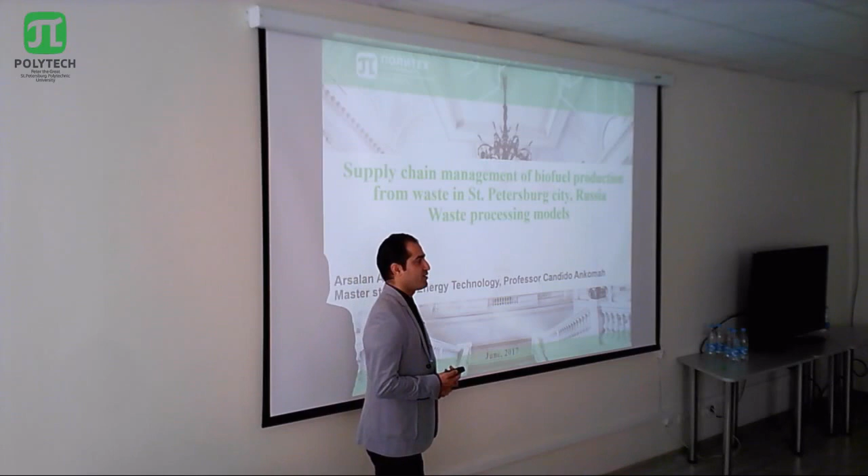Waste generation is an undeniable fact of human's life and used to be considered as a useless material until humankind started facing a shortage of energy sources, high demand of energy, and the utmost importance of global warming. Then they started investigating waste in urban areas, and they found it as a sustained source of energy. Dear professors, ladies and gentlemen,

for St. Petersburg, during the next slides, there will be two models. First of all, some of the problems and challenges of the current waste management in St. Petersburg will be extracted and discussed, and even compared with two neighboring countries, and then two models in general form of chain management will be introduced, and then two of the common treatment technologies will be evaluated financially and technically, and the potential, feasibility, and applicability of those treatment technologies will be approved here.

First of all, St. Petersburg City is located in a very critical location. Why? Because it has access to the Gulf of Finland, and it can easily spread the pollution to the sea, to the neighboring countries, Finland and Estonia. That's why it is very important to manage the waste and stop leaking to the sea.

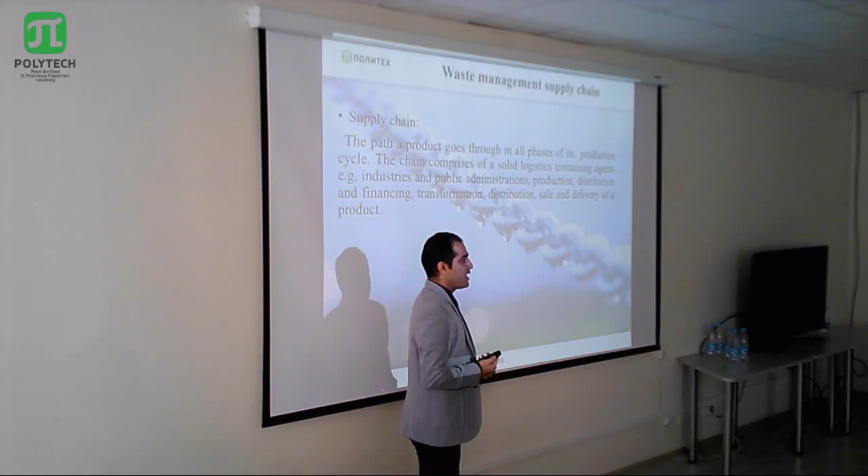Here, a supply chain is proposed to start using waste in a sustained way. Generally, supply chain starts from producers to the consumers. But here, the model is proposed to consider people as the suppliers of the chain. It means that they produce waste, the waste is transported to the facilities, and then the desired products will be generated in those facilities and vended in the market. And again, the citizens will use such products.

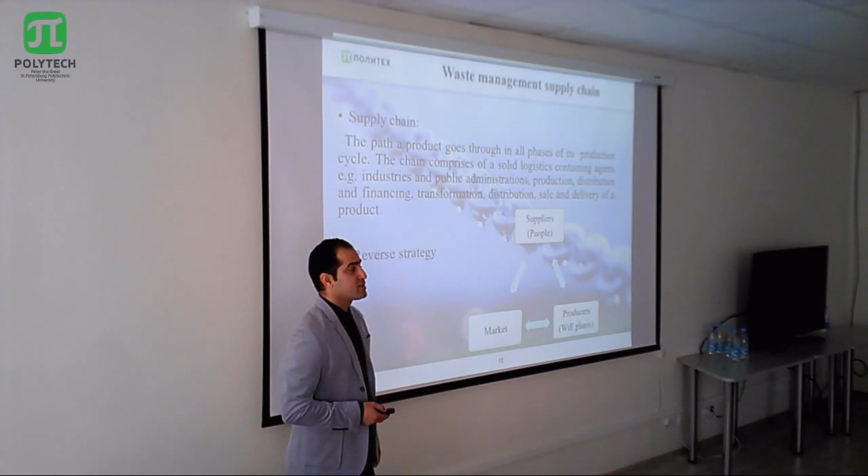So that's why such strategy is called reverse strategy. It starts from people by producing waste and utilizing it in those facilities. And here it is a comprehensive chain to make the process sustained. And as I already explained, here we invest our time, money and energy on raising the public awareness.

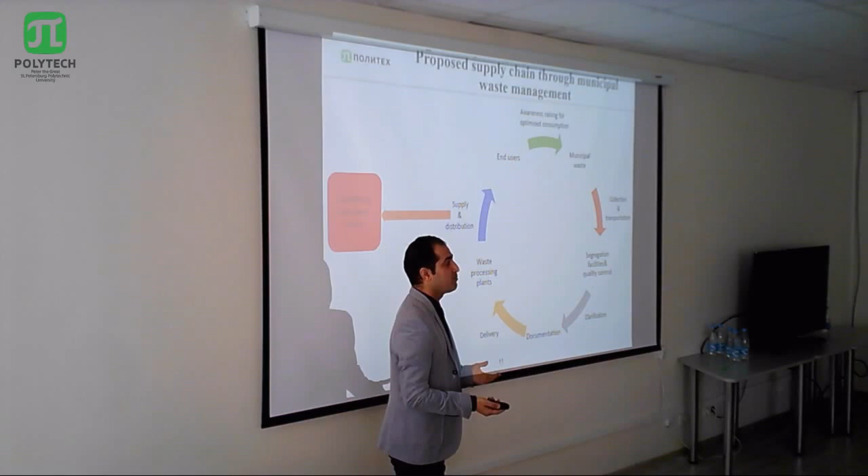And then the waste will be collected, transported, and segregated in some separation facilities. And the statistics about the waste will be classified and shared publicly for scholars, researchers, and university students for further processing, further evaluation. And then the waste, after being segregated, will be sent to the waste processing facilities, and the valueless materials will be disposed to landfills.

Therefore, the general framework of the models will be based on such supply chain management, and the models will be based on household separation as the first scenario, and the second one will be centralized separation. For the first scenario, the waste separation will be performed at houses. It means that there will be 4 different bins for paper, plastic, glass, and food leftovers.

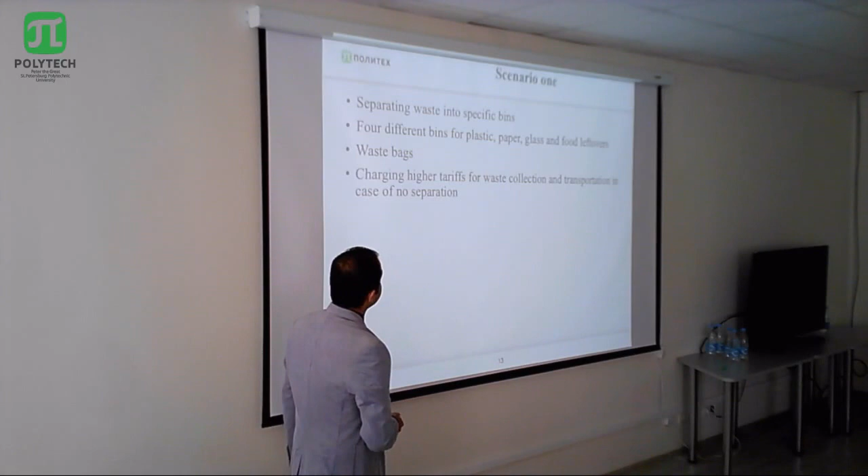And it is even considered to utilize waste bags made up of paper in order to avoid using non-recyclable materials. Householders who do not perform home separation will be charged extra tariffs for waste collection and transportation. And we see the scheme of the first scenario as house separation, then collecting and transporting to the facilities, and then it will be treated or disposed to landfills.

For the features of the first scenario, we can say less amount of waste sent to landfills, reduction in green raw material consumption, useful products such as fertilizers and biofuels, thermally valuable fuels, and the share of biofuel in heat and electricity generation will increase. And due to proposing a near location of waste treatment facilities to the center, there will be less cost of transportation, less distance, and less pollution leakage during transporting to landfills.

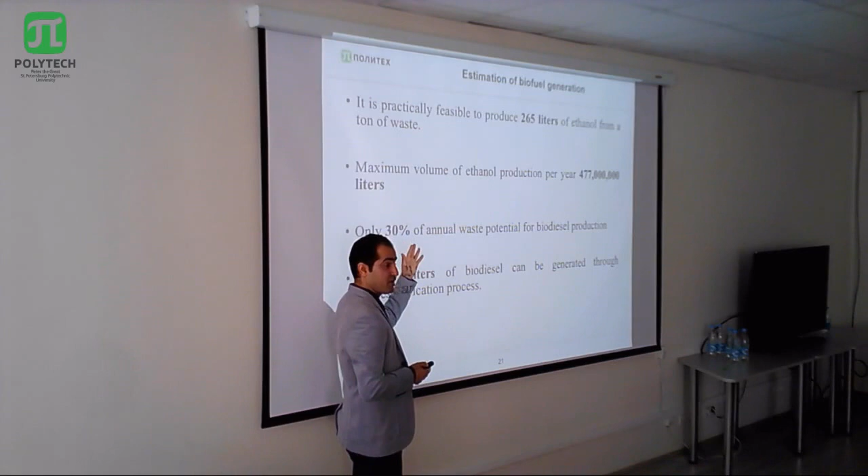Estimation: just using 30% of the waste in the city, we can produce 477 million liters of ethanol. And for 100%, or for 30% of the annual waste, we can produce biodiesel production of 523,000 liters, which is very significant.

For incineration technology, using 70% of the waste in the city, we can have almost 3,500 tons per day to produce 2,700 megawatt electricity per day and well above 5,000 megawatt thermal energy per day. By such amount of energy generated during one year, we can supply 158,000 houses with heat and 3,300,000 houses with electricity.

For the economic aspect, we have different costs including investment costs, operational, and net cost, which will be over almost 12 million, and the payback time will be almost 10.7 years. There will be further work on economic analysis and locating the best position of treatment facilities through algorithms like genetic algorithm.

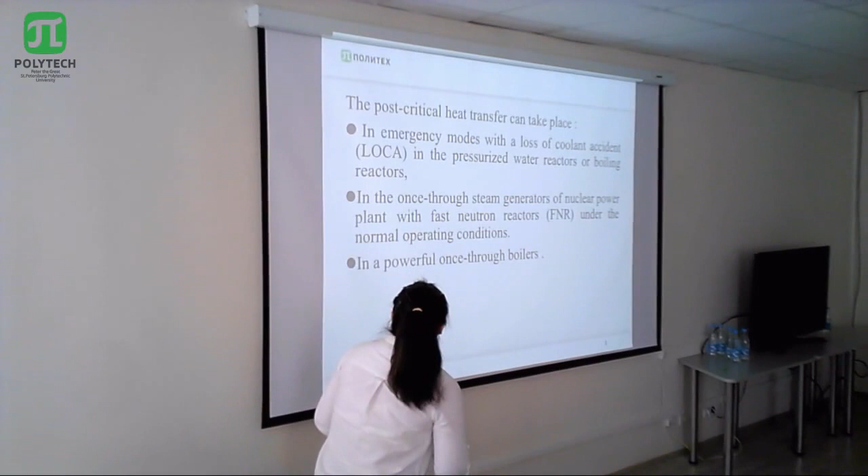Post-critical heat transfer can take place in emergency modes with loss of coolant in pressurized water reactors or boiling reactors, in once-through steam generators of nuclear power plants with fast neutron reactors under normal operating conditions, and in once-through boilers.

There are two kinds of crises in flow boiling. The first is the point of departure from nucleate boiling, which takes place at high heat flux and low void fraction, and there is the point of dry out. After dry out is the dispersed flow film boiling, and dry out takes place at high heat flux, but lower than the point of departure from nucleate boiling, and at higher void fractions.

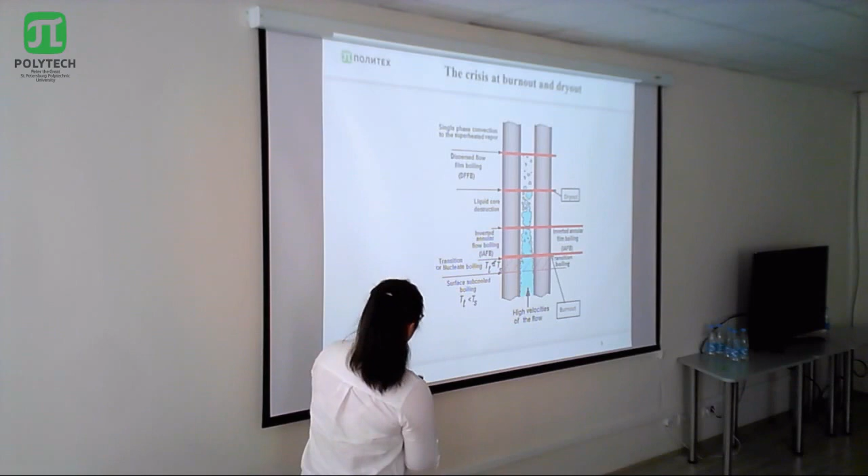The aim of my work is to compare two rather simple engineering techniques for calculation of the heat transfer coefficient in dispersed flow. I chose simple and technical models: one is the equilibrium method by Miropolsky, and the other is a non-equilibrium technique based on the Hein-Köhler model. I also used a code for best estimation of thermal hydraulics of circuits of nuclear equipment, and experimental data as basic data to compare the calculations with the two methods.

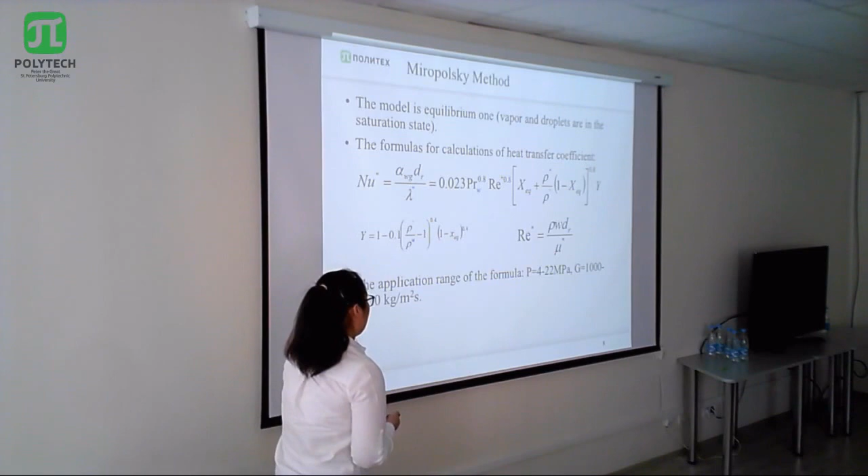Now I will explain the process of the Miropolsky method. You can see in this formula here the number of plots that need to be calculated and the wall temperature. But at first we don't know the wall temperature, so we just assume it, only from 1 to 3 Kelvins higher than the saturation temperature.

We need to calculate the physical properties at the given wall temperature, and step by step receive the calculated wall temperature. Then we need to compare the given wall temperature and the calculated wall temperature. If the difference between them is very small and the values are close, we can obtain the wall temperature. If not, we need to do the cycle again.

Another is the non-equilibrium model. Here is the original Hein-Köhler model. This is the formula used to calculate the non-equilibrium coefficients. This is for the original one, but in my work I changed the formulas to calculate the parameters. You can see these values are averaged in the coefficients, depending on the heat flux, the flow rate, and the number of droplets in the flow.

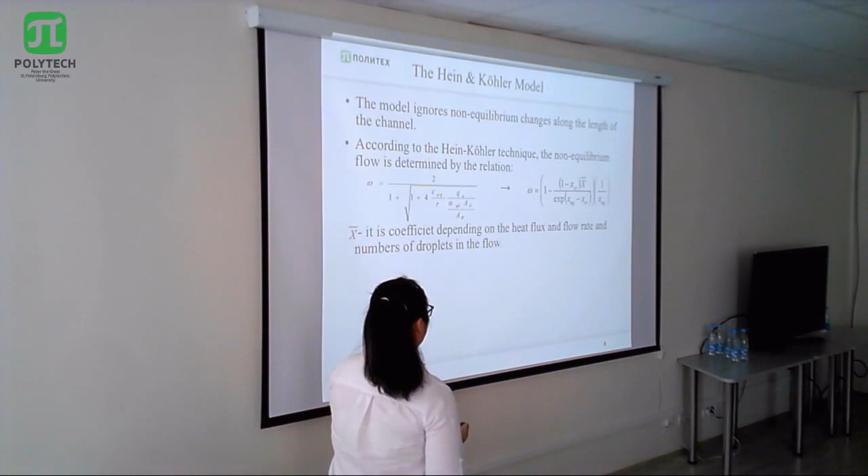This is all from the original, and in my work I will use these formulas to calculate the actual vapor content and the vapor temperature. This is used to calculate the wall temperature.

Here is the process of calculation by the modified Hein-Köhler model. In this model we need two cycles: one to calculate the vapor temperature, and another to calculate the wall temperature. You can see here the physical properties use the average temperature between the vapor and saturation temperatures.

But we need to calculate the vapor temperature. So we also need to give a vapor temperature to start, calculate the non-equilibrium coefficient, then calculate the vapor temperature and compare it, to obtain the vapor temperature from the given temperature. They have a similar principle.

So once we receive the vapor temperature, we calculate the actual quantities and use these steps to calculate the wall temperature. We also need to compare the given and obtained wall temperature. If the values differ by less than 1 Kelvin, we can get the obtained wall temperature as the final temperature. So that is the process.

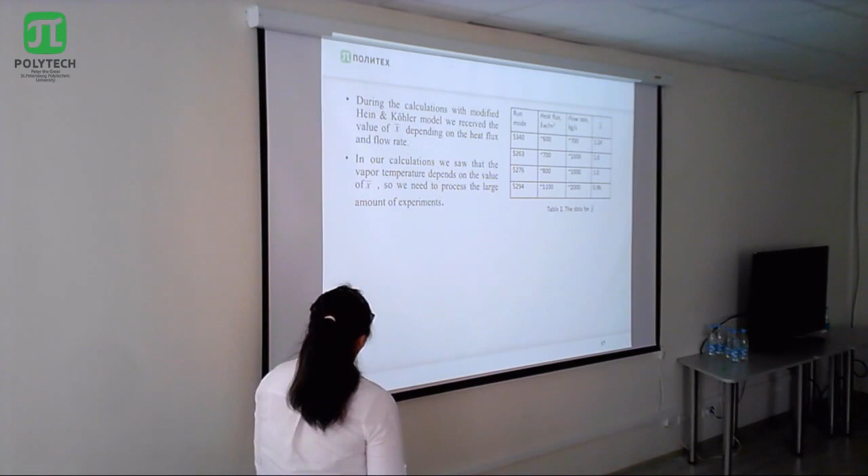In conclusion, the review of the literature on the two-phase flow heat transfer is done. There are two engineering models which were chosen for comparison: the Miropolsky method and the modified Hein-Köhler model. The Bennett experiments were used for comparison of these models, as basic data.

The results of wall temperature calculation based on the Hein-Köhler model show that obtained values differ from the experimental data by no more than 70 kelvins. For the Miropolsky method it is no more than 80 kelvins.

The KORSAR program can be consistent with the experimental data, so the KORSAR program also will be improved in the future, and it may be done using the modified model. Thank you.

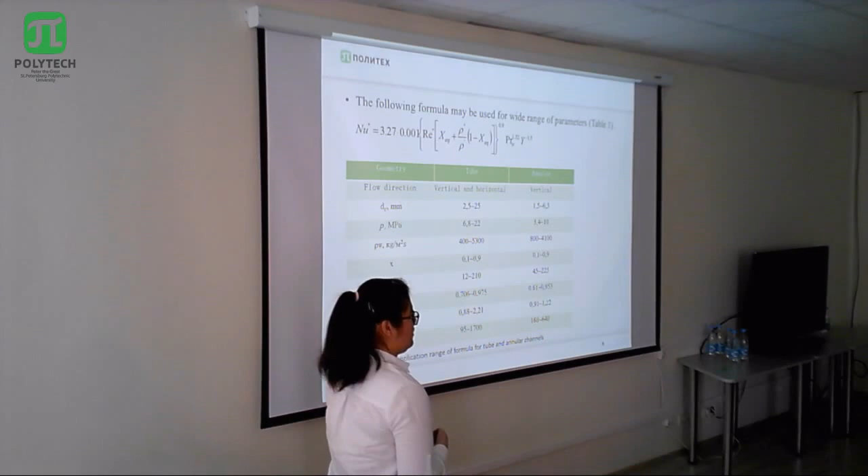Oh, okay, very nice. And also, in the introduction, I had one remark for you not to use your fingers while you present something, but then you began to use the laser, and it was very nice. That's okay. Thank you. Any other questions? Thank you very much.

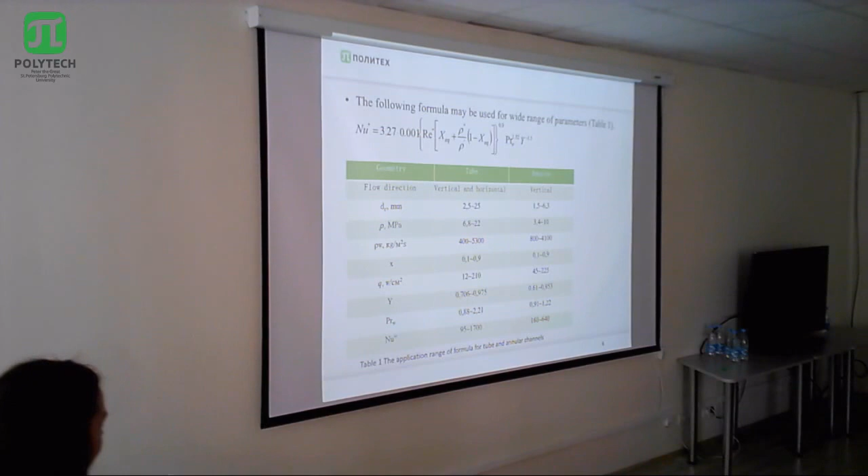The next speaker is Sultan Mahmoud. His master's thesis is Novokuznetsk City Heat Supply Systems Concept Development. Supervisor, Assistant Professor, Mr. Gimai.

Sultan. Yeah? Yeah. Yeah? I hope so. Yeah, previous, this first one. Yeah. Yeah, go ahead.

Dear committee, I am going to present my master's thesis, which is the role of the heat supply system in the city. First of all, I want to mention why I chose this project: because this project is currently developing in our university at the Department of Power Engineering, and partly I've been involved in this project.

So the content of my master thesis is as follows. We will go through introduction, general information about the city, current situation in the sector, design of mathematical model in the software, proposal for improving energy system, results and conclusion.

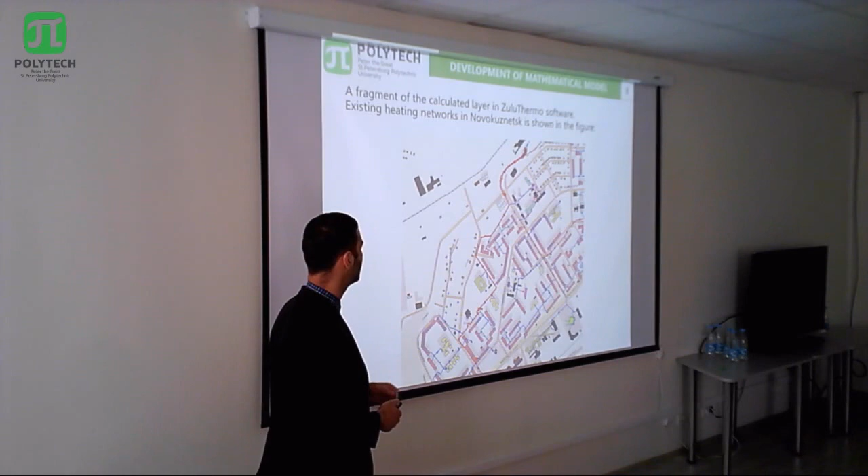So these are the proposals for improving the energy system. You can see that for each supplier there are different operations which should be done by the year 2032. On the West Siberian Thermal Power Plant there is an organization of technological communication on the steam between first and second stages, dismantling of turbine units on the central thermal power plant and commissioning of the hot water boiler.

For the initial boiler houses, we are going to close them and transfer the heat load to Kuznetskaya thermal power plant and to the central thermal power plant. These operations will help us to increase economical efficiency and to save fuel.

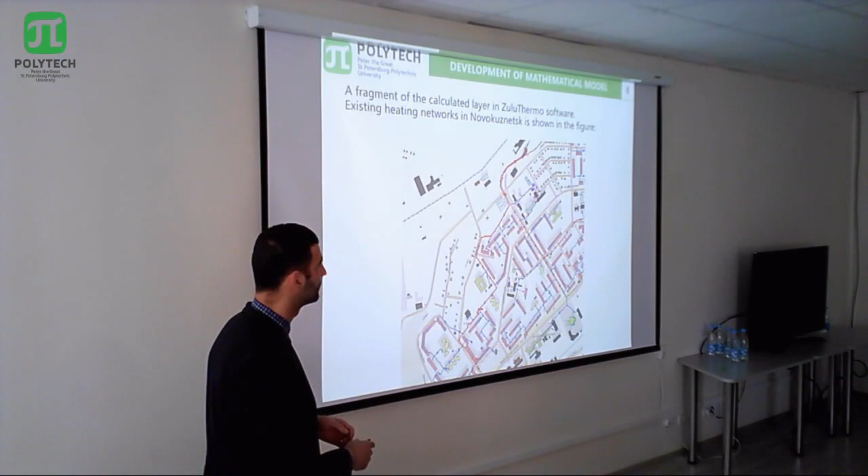So, let me ask a short question. So first of all, thank you for your presentation. It's very interesting. Could you go back to slide number 6? There were some percentages, and it was higher than 100. So just this comment, maybe I haven't heard the right information. Number 6. I'm trying. Okay. Sorry, it's not. Yes. Number 6, yes.

So here, for example, the first 2 bars, they have 100-something percentages. Could you give some short comments? So that means a bit more than 100. Because it's the total amount, can you explain?

Because yeah, this is this boiler house. This is proposed. So it's slightly remote right now. So they have, let's say, more consumers for now, but after improvement of the energy system, we can get this amount of energy supply. Any other questions? Thank you very much.

Next is research of application of heat pump system in conjunction with boiler for individual consumption. Supervisor, Associate Professor Bogan Karamonova, advisor, Ekaterina Demushkova.

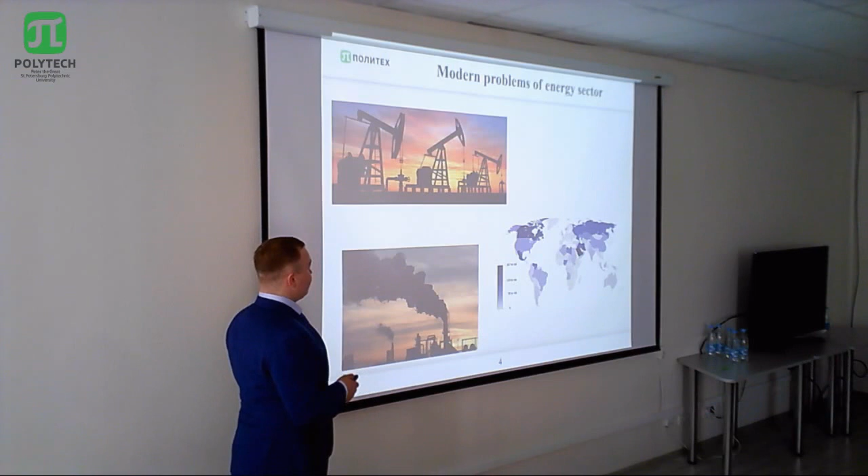And of course, the ecological problem, because 50% of the emissions in the atmosphere are produced by the energy sector. So one of the main solutions to all these problems is to remove the fossil fuels and to use renewable energy sources. So on the level of the country or worldwide, it is really difficult to do. It is big work, and it will cost a lot of time and a lot of investment. But on the level of the individual consumer, it is quite possible.

One of the renewable technologies is the heat pump. So the heat pump is the machine that takes the heat from the low potential source and gives it to the high potential source, so to the consumer. So these are the main components in a heat pump: the evaporator, the compressor, the condenser, and the expansion valve. So the working fluid in the heat pump is the coolant.

As the low potential heat source, the heat pump can use air, river water, groundwater, and the heat of the ground. So in the beginning, when you're designing the heat pump system, the first thing is to choose the low potential source. So on the next slide, these are types of heat pump systems with different low potential sources. So the first one is the air-water type. So the low potential source is air.

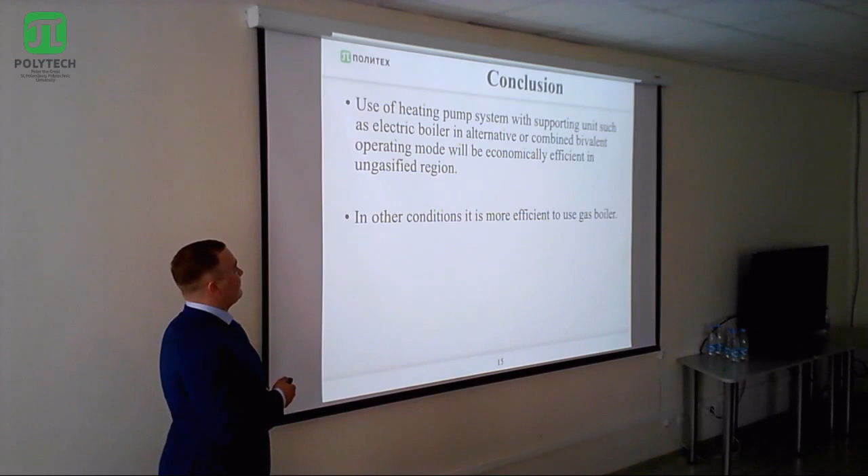So yes, as I said, it is economically efficient to use the heat pump system with the electric boiler in an alternative or combined bivalent operating mode in ungasified regions. In other conditions, it is more efficient to use gas boiler.

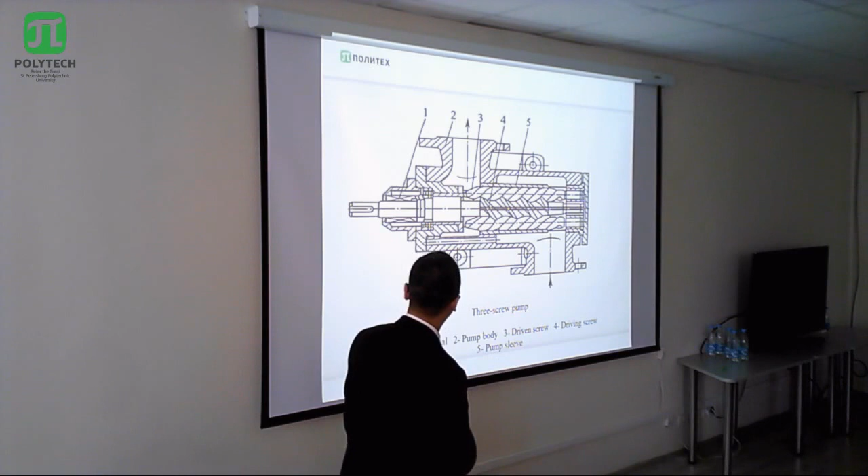The main working process is to change the volume of cavities: to increase the volume of cavity in the suction chamber and to decrease the volume of cavity in the output chamber. This is the difference between dynamic pumps and positive displacement pumps.

I will repeat it in the conclusion. This is the experimental investigation of pumps. This picture is the scheme of the laboratory stand, and this picture is the equipment.

There are tables about the experiment. This table is the experimental table, and this table is the coherent table. Depending on the coherent table, I made the graphs for the screw pump experiment. They show dependence of displacement, working pressure, shaft power, and total efficiency on performance pressure.

The object of this experimental research is the centrifugal pump. This is the experimental data, and this is the coherent data. Based on the coherent data, I made the graphs for this case, showing total head, shaft power, and efficiency depending on displacement.

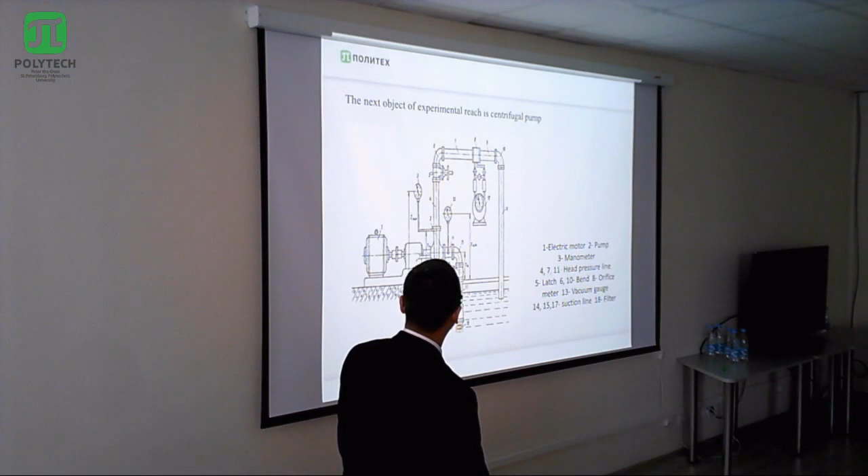Thank you very much for your important presentation. My question is about the graphs shown during the presentation, some handmade graphs. That means you had done some experimental work, since you also showed some experimental rigs, and even a photo of a rig.

So these graphs are based on data you obtained in an experiment? It was based on the correlation data, calculated data. The left is the experiment, the right is the calculated data. So you not only calculated something, but you also took part in experimental work.

Yes, this experimental data, you obtained it with your supervisor? Yes. So there were not only calculations but also experimental work, so it's very important to say this, to emphasize that you used experimental data to move to calculations and to make suggestions. Exactly, that's the point. Thank you very much.

Question: what do you think about the reversibility of hydraulic machines? I think the pumps may work as engine, and the engine also may work as pump. For a pump, it's necessary to change the direction of the liquid. For positive piston pumps, it is necessary just the same, changing the distributing parts such as valves.

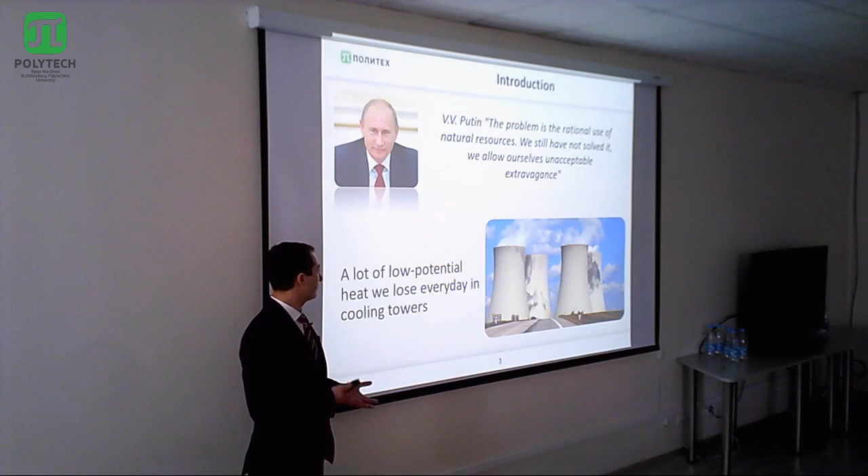As our president once said, we have a problem with rational use of natural resources, and unfortunately we still can't solve it, and we allow ourselves unacceptable extravagance. As an example, I can say that we lose a lot of low potential heat in cooling towers every day. Why? Actually, we can use it, and as a result we'll save fuel and reduce emissions.

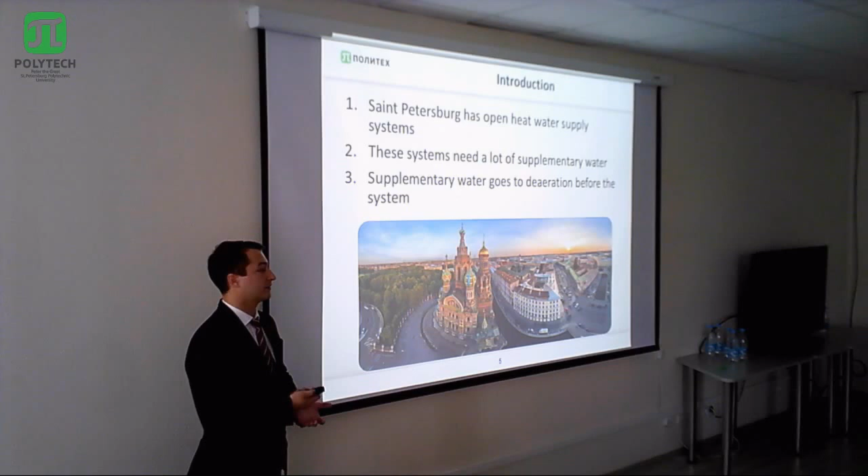As you know, St. Petersburg has an open heat water supply system, and this system requires a lot of supplementary water, which goes to deaeration before the system and is supposed to be heated. I propose to use a heat pump to heat it before deaeration. As an object, I consider the Pravoberezhnaya combined heat and power plant number 5 with a combined cycle gas turbine unit located in St. Petersburg, Russia.

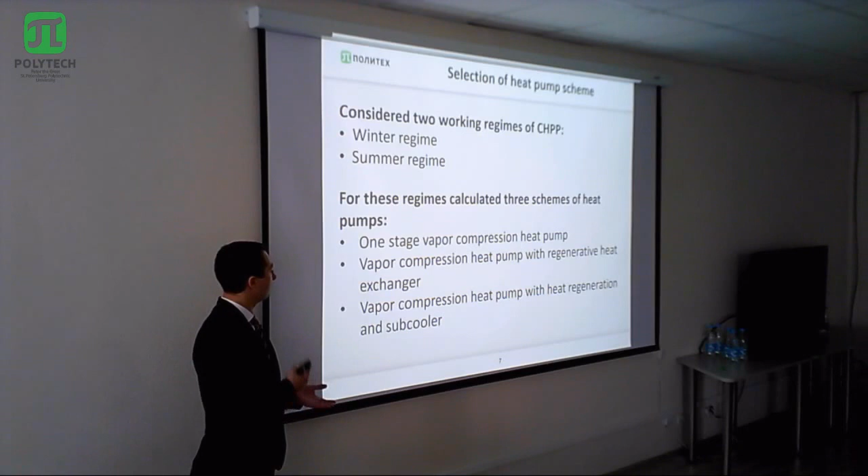Let's move to selection of the heat pump. For the calculations, we're considering two working regimes of the station: winter regime and summer regime. For these regimes, I calculated three schemes of heat pumps: the first is a one-stage vapor compression heat pump, the second is a vapor compression heat pump with regenerative heat exchanger, and the third is a vapor compression heat pump with regeneration and subcooler.

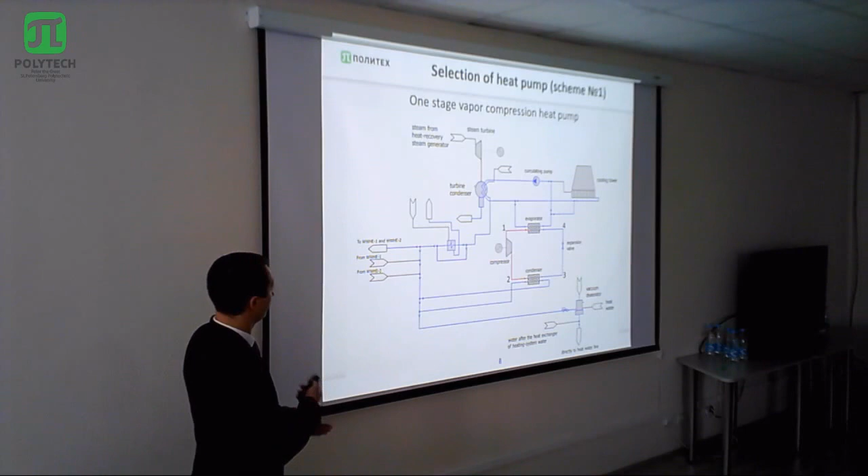Let's move to the schemes. The first one, as already said, is a one-stage vapor compression heat pump. Here you can see exactly the heat pump, the circulating water, the cooling tower as low potential heat source, and here the high potential heat source. After the heat pump, it goes to the deaeration. Scheme number 2 is similar but has a regenerative heat exchanger, and the third scheme has also a regenerative heat exchanger and subcooler.

According to the results of calculation, for my condition, scheme number 3 was the best option because it has the smallest mass flow rate of refrigerant and the biggest exergy efficiency.

For economical analysis, I considered this scheme, number 3, with different rated power of heat pump: 10, 20, and 30 megawatts.

So you may have one question for me, like where exactly I can save the fuel? The answer is heating boilers, water heating boilers. For the economical calculation, it was needed to analyze the working regimes of these boilers. The station uses boilers of type KVGM-100.

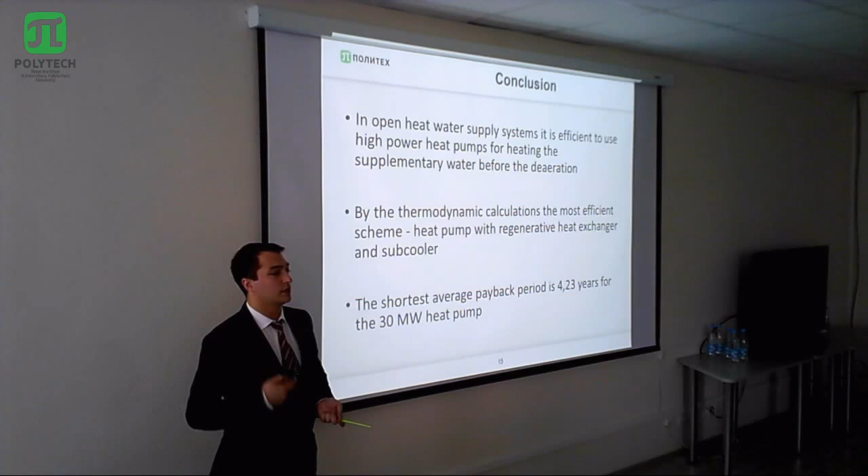In open heat water supply systems, it's efficient to use a heat pump to heat the supplementary water before the deaeration. By all my calculations, in my conditions, the most efficient scheme was heat pump with regeneration and subcooling. The shortest average payback period was shown by the heat pump with rated power 30 megawatts. Thank you for your attention.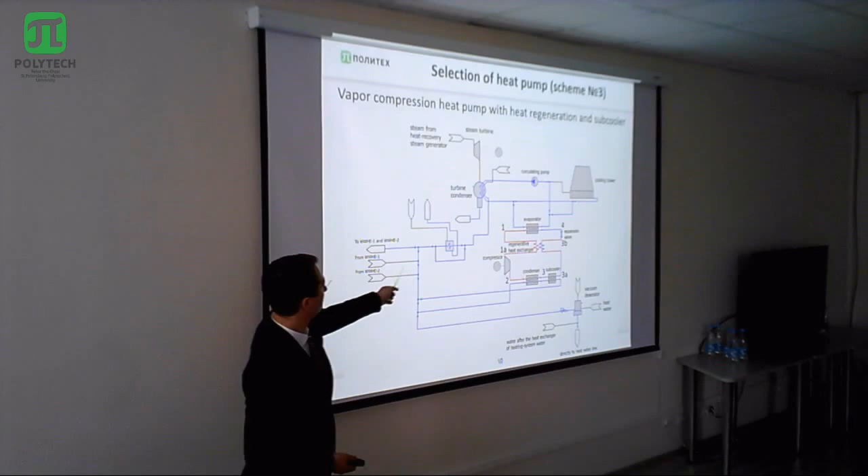To cool the air? Okay, I will show it here. Actually, I cool the water in this circulation circuit with the cooling tower, which goes from the condenser of the turbine. Your question is about cooling the air or the water? If, for example, one of the ways to make this scheme work is to implement heat pumps.

Yes, but are there any other variations? What else can you suggest here, or is it only with heat pump? No, actually it's not. We can use any refrigerating machine or whatever. Also, in my opinion, we can use, for example, a heat exchanger. Every station has its own heat needs, so we can use any heat exchanger for its own needs for heating or water supply for the station.

And the second question is, in general, which kinds of heat pumps do you know? Okay, it depends on how you look at it. For example, as my colleague already said before, it can be air-water, water-water, or ground-water types of heat pump. And in general, technically, it can be compression and absorption types. So here is a vapor compression heat pump. It's just a simple scheme of a one-stage heat pump.

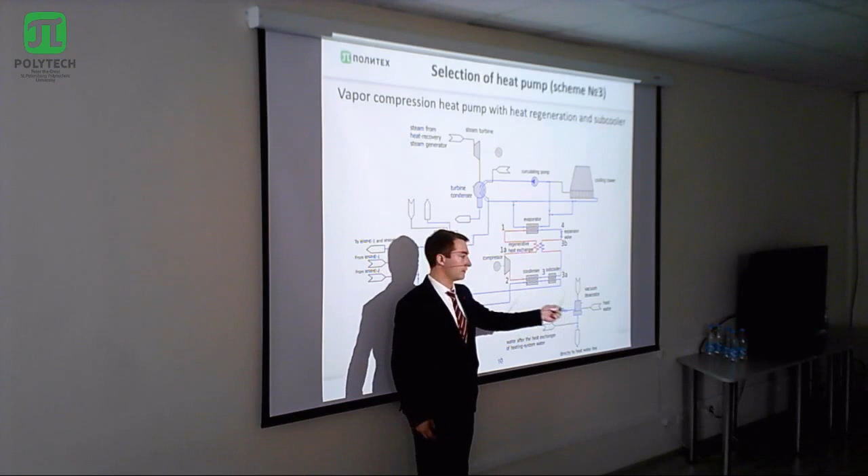Any other questions? What is the life cycle of the equipment? Okay, thank you for the question. In my work I consider 15 years, but actually the heat exchangers can work like 30 years or more. The smallest lifetime will be in the compressor and motor. So, for example, after 15 or 20 years, we can replace it and it will still be working.

So, how much is that? What? How much does it cost?

I can show the capital cost of the replacement part. I would like to say that we need to ask some companies to have a commercial offer. I know, but how much will it cost? How much is it costing now? Now I have the capital cost of a whole. Okay, so you did not look at the various parts. Yes, actually, I considered that, as I already said, the lifetime is 15 years. So I was calculating all the data about this one.

Okay. So theoretically, after 15 years, you have to buy a new pump. Yeah. But in my opinion, it's not needed. Actually, we can replace. Sorry. But it will depend on the operation. So my question is also where to buy the heat pump in 10, 20 or 30 megawatts? Okay, in general, I would like to say that it's not just one heat pump. It will be several heat pumps.

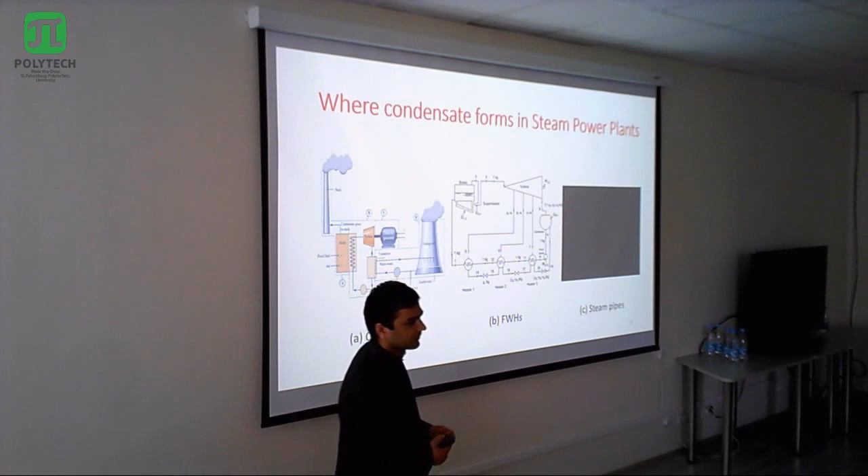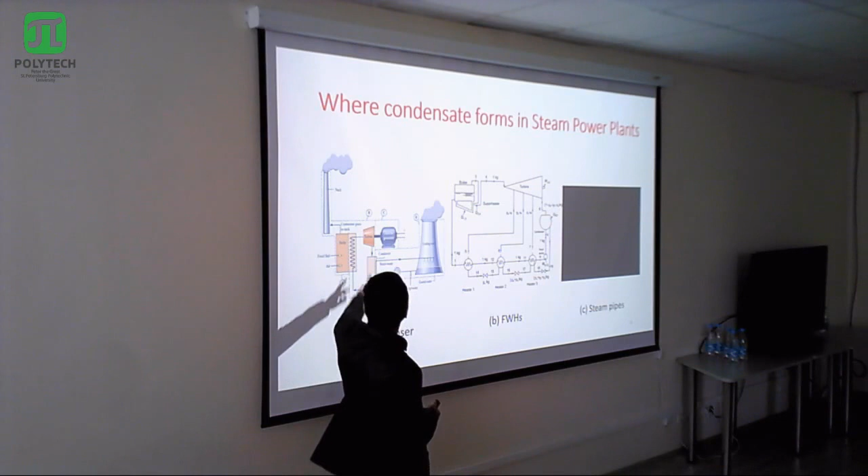And this condensate is very important because this is treated water, and it has the same temperature and pressure as the saturated steam. So basically, condensate comes from three locations in a steam power plant. First is the condenser. We all know that in the condenser we have this cooling system where we cool down the exiting steam from the turbine, and then we have condensate.

Condensate is also generated in the feed water heating system, where we have extracted steam from the turbine that is used to heat up feed water in the feed water heaters. Like in this regeneration process, we can see that at points 5, 6, and 7 we have extracted steam, and it will transfer the latent heat and convert into condensate. The condensate is then cascaded backward from heater 1, 2, 3, and finally to the condenser hotwell.

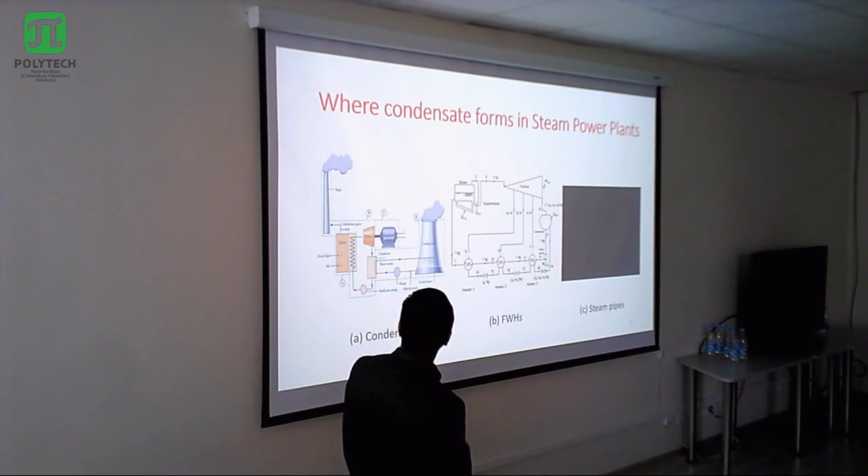And then we have some condensate generated in the steam pipelines that can cause many problems that we will discuss in a while. So, like I said, this condensate is important because when we have this expansion in the turbine, we condense the steam from the saturated condition to the saturated water condition. And during this condensation, the temperature and pressure remain constant.

This condensate contains about 10 to 30% of the total heat contained in the main steam. That's why if we can recover this condensate economically, we can reduce the boiler fuel demand by 10 to 20%. But there are some problems related to condensate. The main two problems: one is water hammer, and the second one is flash steam.

So basically, water hammer occurs when we have condensate in the steam pipelines, and if we are not removing it properly, those slugs of condensate are pushed by the high velocity steam, and water hammer occurs. The consequences of water hammer are problems with the pipework equipment, fractures in pipeline fittings, and some loss of live steam.

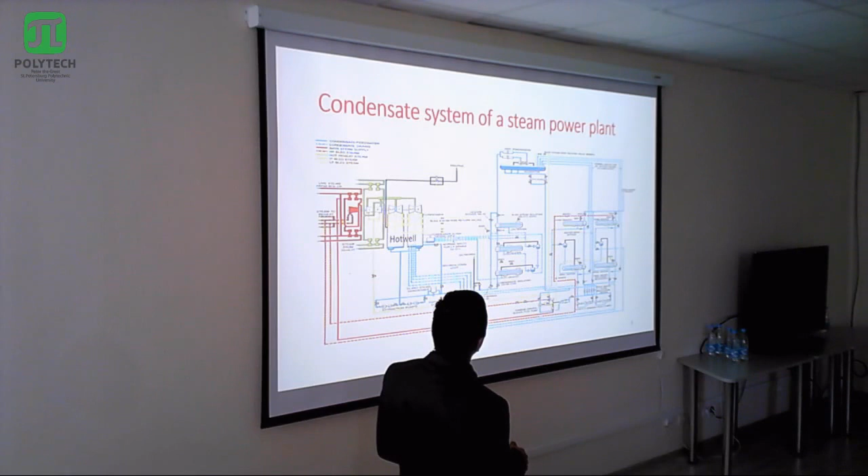So some components of the condensate system: again, steam traps are really important because these are automatic valves, and those are used to remove condensate from the steam pipelines. And then we have some flash vessels. Flash vessels, as you can see, this is a low pressure line and this is a high pressure line. And when this pressure difference occurs, some of the condensate changes into flash steam. So this flash vessel is used to separate this flash steam from the condensate.

And then we use some kind of strainers. Those are used to remove dirt and other solid particles from the condensate and steam pipelines. Then we use some valves and pumps that can be covered in a different topic. And the steam drain system. The steam drain system is basically: before starting a steam power plant, we have to warm up the steam pipelines and the valves. So in that condition, we need this steam drain system, and the steam is heating the pipes. Then this goes from the pipelines to a drain receiver or collector.

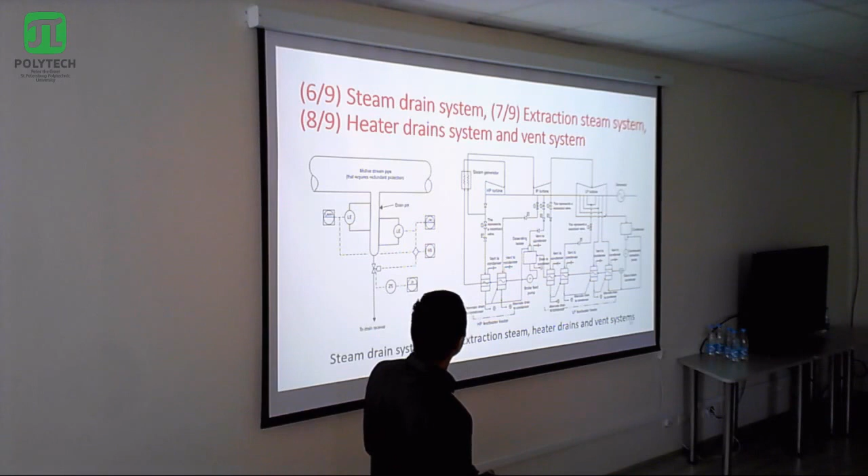And then this condensate dump system is also part of the condensate system, which is used to maintain a proper level in the condenser hot well. So in situations where we have more condensate in the condenser, this is dumped into the condensate storage tank. And when we need more condensate, then it is pumped back to the condenser hot well.

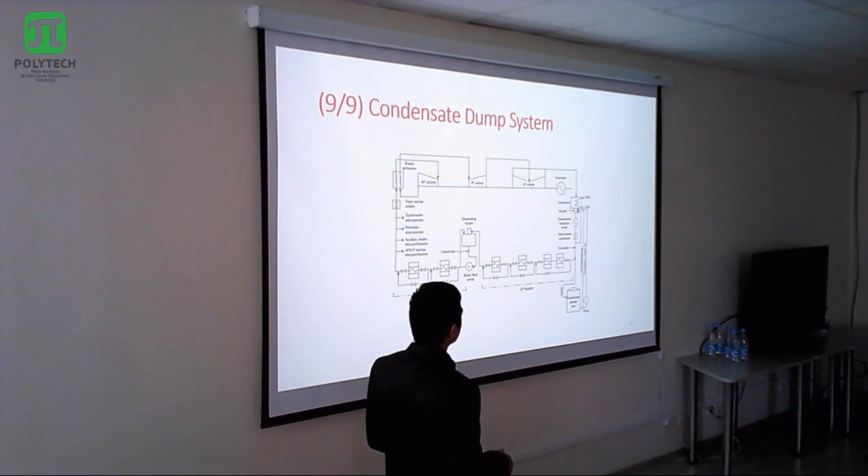So now coming to the design rules. The first and most important step in the design process is the piping network. Basically we can have more options, but I talked with my supervisor and he said that we can have at least 3 options. In the first option, we simply drain the condensate from the heaters into the condensate tank, and from there we can transfer it to the boiler directly, to the deaerator, or to the condenser hot well. This piping system requires little attention during operation, but the problem is the heat is dissipated in the condensate tank and we cannot recover the heat from the condensate.

In the second option, we cascade the condensate from the higher pressure heaters to the lower pressure heaters, and after that we can move it to the condenser hot well or deaerator. But here the problem can be that if the pressure here is higher and there it's low, we can have huge velocity in these lines that can damage the piping network, equipment and other fittings.

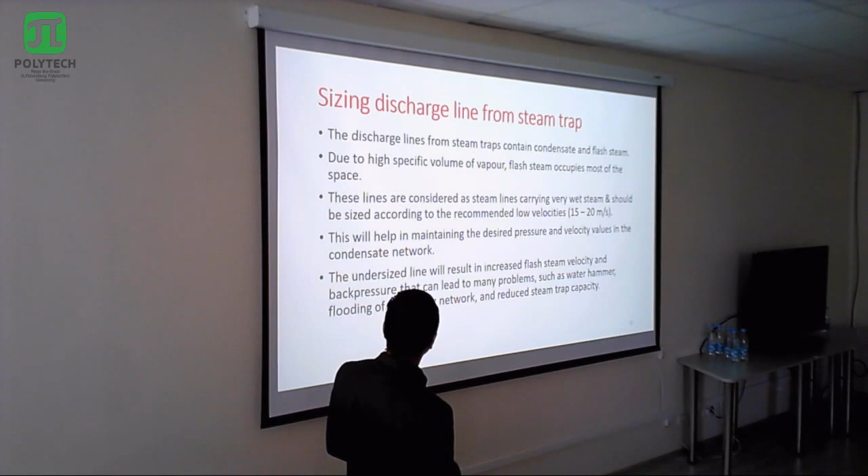Wait, sorry to interrupt you, but can you please summarize your work? So okay.

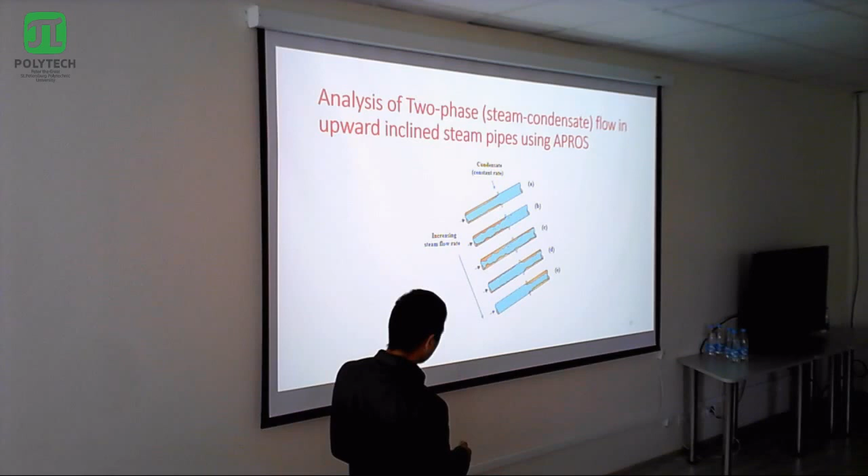So this was one analysis done in the APROS software where we have condensate in the pipeline, and these are the upward inclined steam pipes. When we increase the steam flow rate, the condensate will move upward with the steam velocity. The purpose of this analysis was to find out what factors can affect this condensate flow. It was observed that the steam velocity does not change with the length and the temperature difference between the pipe inlet and outlet.

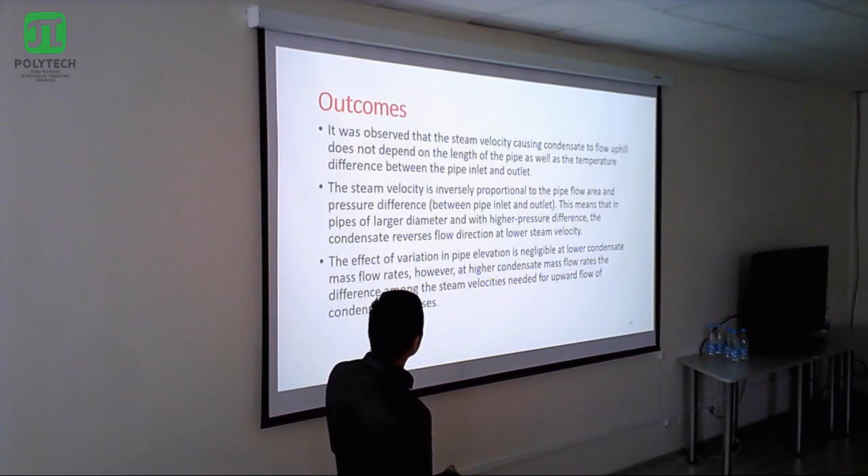And the steam velocity needed to push the condensate upward in steam pipelines is inversely proportional to the pipe flow area and pressure difference. The effect of variation in pipe elevation is negligible at lower condensate mass flow rate, but at high condensate mass flow rate it affects the steam velocity needed for upward flow of condensate.

So in the future we can work on the topic more because the time was short, and some experimental work should be done to understand the behavior of two-phase flow in upward inclined pipes. Thank you for your attention. There was some problem with those videos, so I'm sorry about it.

Henrik showed excellent academic performance with 13 excellent, 1 good, and 0 satisfactory grades, and his academic supervisor believes this work is thorough and deserves an excellent grade. Do you have any questions? Yeah, first, thank you very much for your work. At the last slide, there is this: thank you for your attention. Do you have any comments, questions, suggestions?

I have one suggestion. According to the last slides, I understood that you really did a great job and you investigated a lot. You have models and different graphs to show us. But from my point of view, your presentation was very long. You tried to put as much information as you had. My suggestion for the future is to start from the most important things of your presentation, so as not to lose your time and hurry up.

And the second question is, what was innovative in the work? What do you think? Innovative, like what was new? This whole topic is a new topic. No one is talking about the condensate system. We only talk about the steam, because steam is very important in a steam power plant. So everyone is talking about this system, the steam that is going to heat up the feed water heaters.

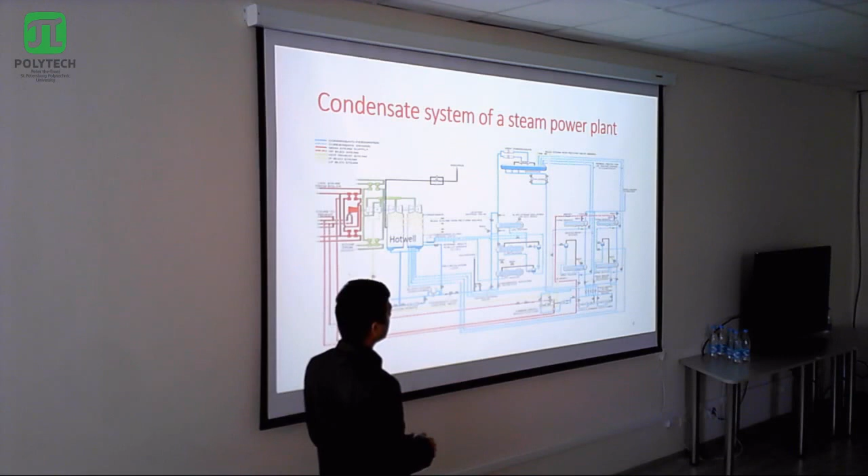But no one is talking about the condensate. What do we need to do with the condensate? What are the problems with the condensate? How can we design this network? So this is a totally new topic, and we cannot find this topic in the books. We can find maybe some sections, like how condensate changes in chemistry. But there is no direct source that you can point to.

What was your literature source? In which country, or which professor is nowadays the most outstanding in this field? So mostly the references were from the companies and industries who are specialists in the condensate system. And you can see in my notebook, those are European sources. Yeah. Thank you very much. Thank you.

Master thesis, organic Rankine cycle simulation for industrial waste heat recovery. Should I take it? Supervisor Professor Ramonova, advisor Professor Scala.

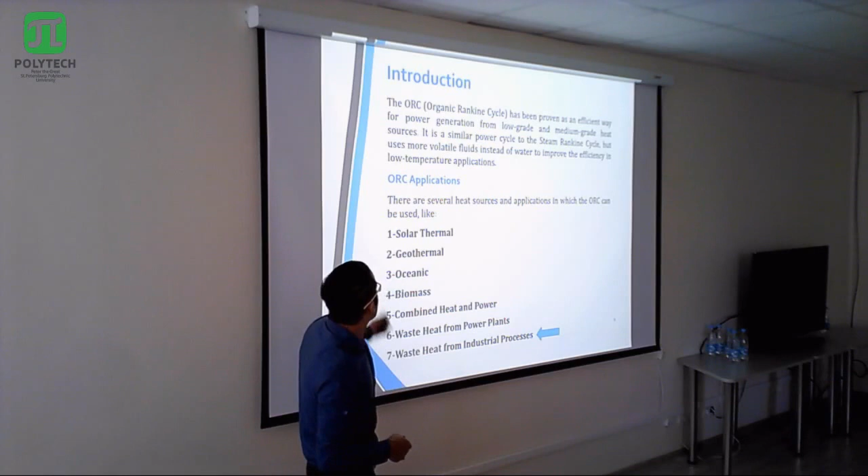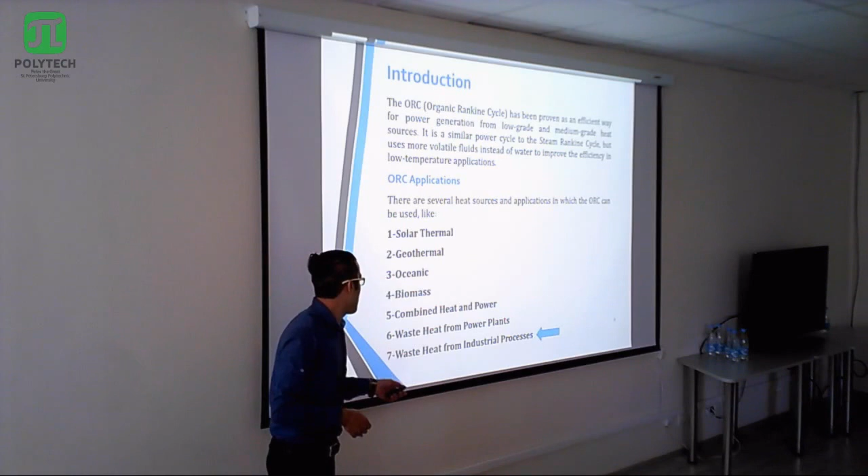Actually, organic Rankine cycle is a new field in power generation for low and medium grade heat sources, which we can't generate energy from with the steam Rankine cycle. So we can use the organic Rankine cycle because organic fluids in this system have better efficiency than steam. And also there are some applications: we can use solar thermal, geothermal, oceanic, biomass, combined heat and power, waste heat from power plants, and waste heat from industrial processes, that we

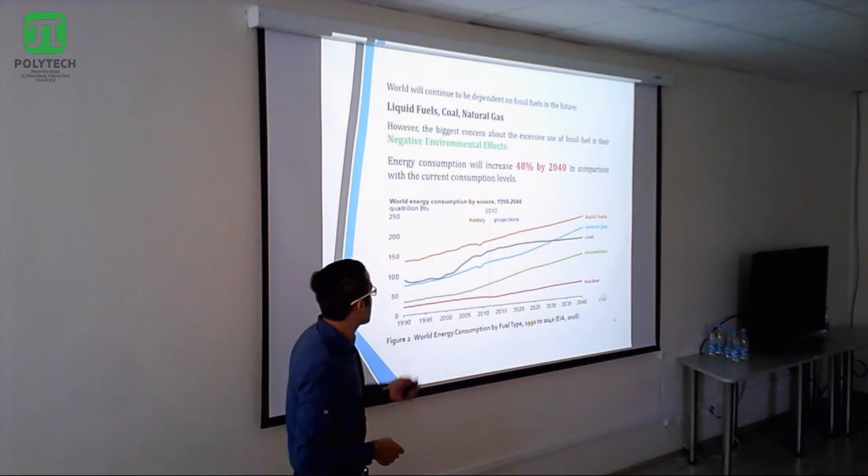And nuclear, renewable, coal, natural gas, liquid, all of them are increasing. And we need something to increase the performance of energy generation. With waste heat recovery, we can use temperatures from 100 to 400, because below 400, the steam Rankine cycle doesn't have efficiency, and we can generate energy from it. At 100 Celsius degrees, like geothermal, and after that industrial processes, 200 solar, 300 and some internal engines till 400, sometimes 450, it depends.

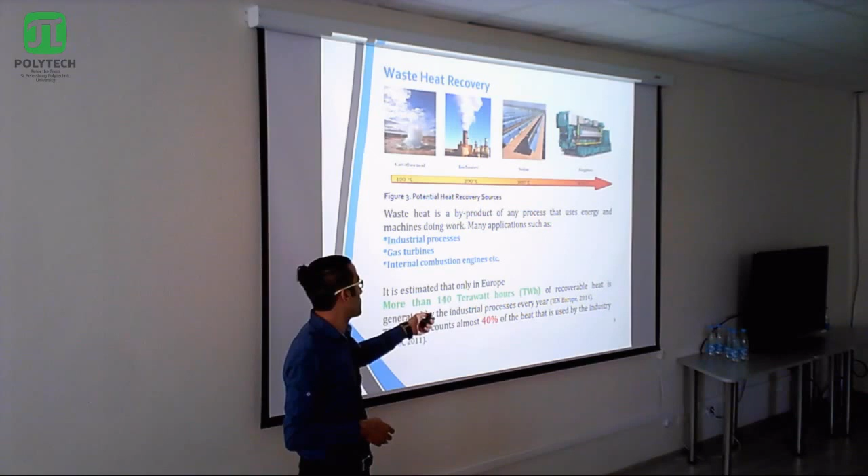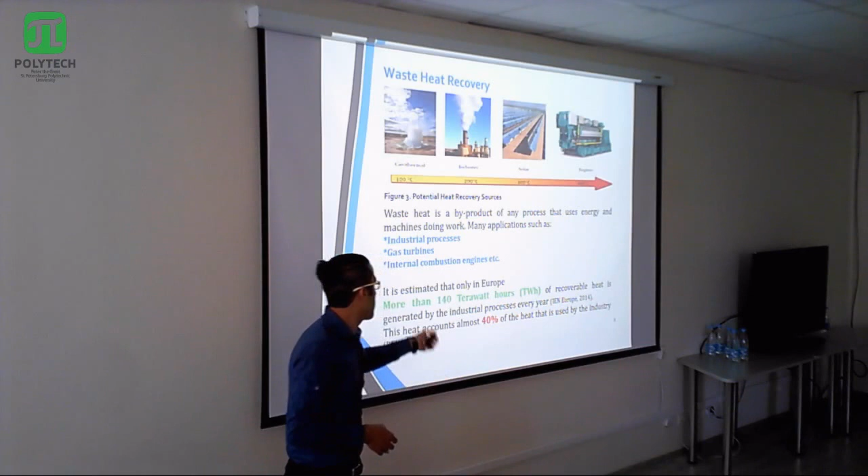So now in European countries, more than 140 terawatt hours of recoverable energy are being generated, and it's almost 40% of the heat used in industry. And it's a big amount of energy. And here we have a comparison between the organic Rankine cycle and the steam Rankine cycle.

Especially in this figure, we have organic Rankine cycle and steam turbomachinery comparison. In the steam Rankine cycle, we have small fast-moving molecules that cause erosion in blades and turbine, and also we need multi-stage turbines and higher speeds, and it costs a lot. But in the organic Rankine cycle, we have large flow rate with large molecules and smaller rotation, and we have fewer stages for the turbine. Also, efficiency of turbines can be 85 to 90%. It's larger than the steam Rankine cycle.

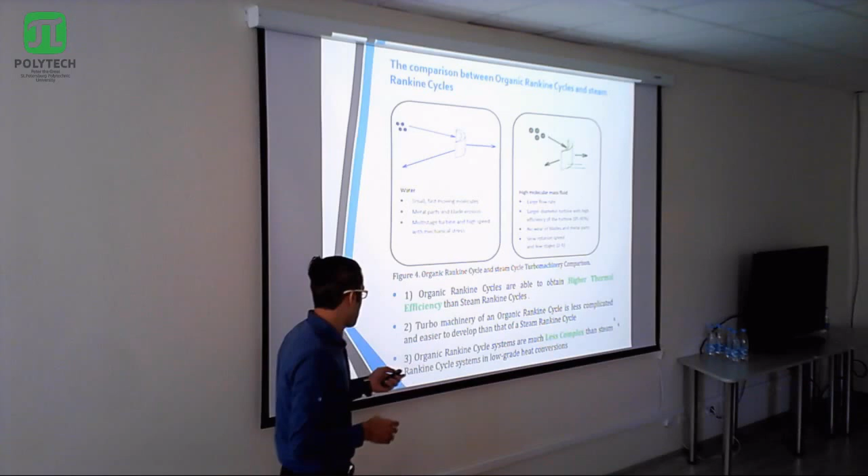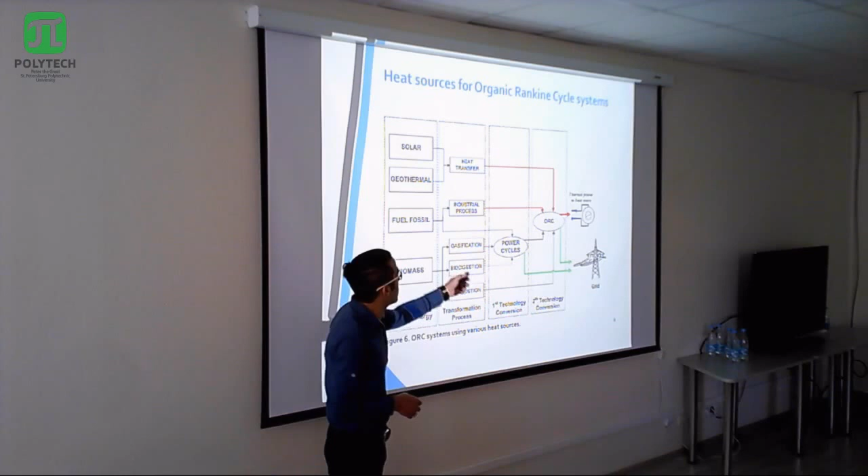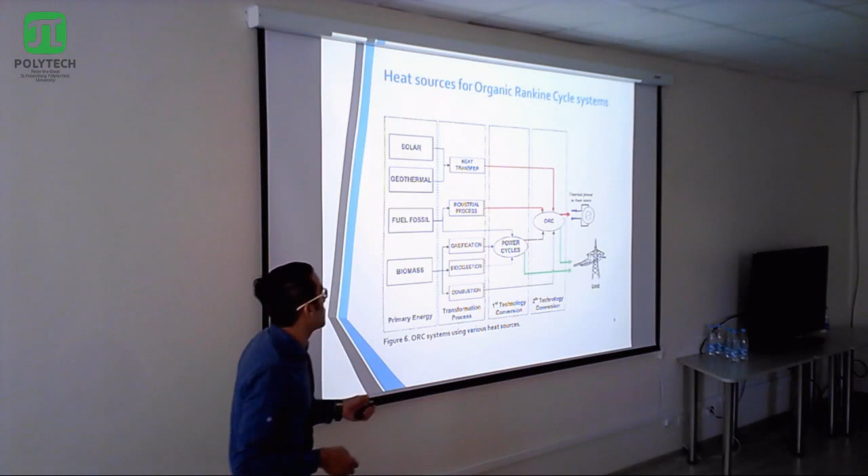Here we have the sources from which we can generate energy in the organic Rankine cycle: solar directly to the ORC system, geothermal also directly, fossil fuels in industry, and also in power plants, after steam turbines or gas turbines we can use ORC, and biomass gasification, digestion, combustion. Also, we can use ORC as a second technology.

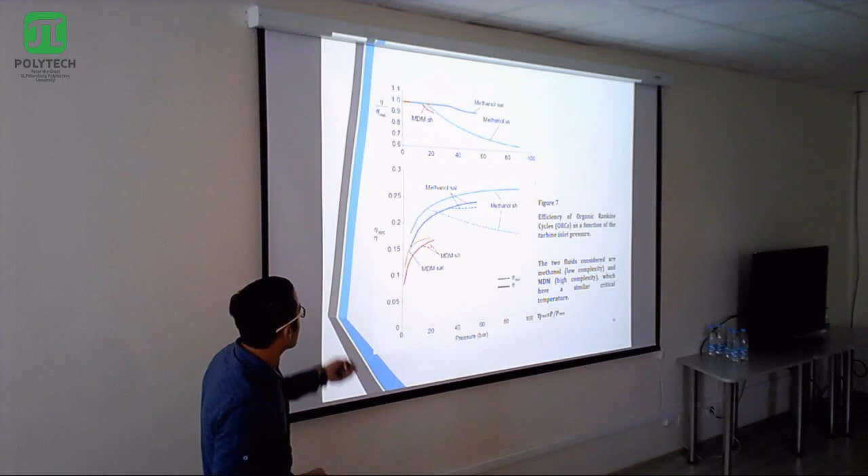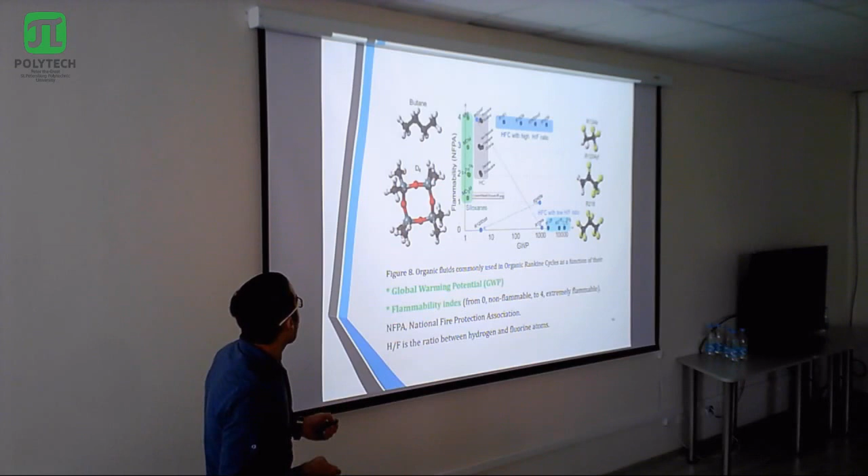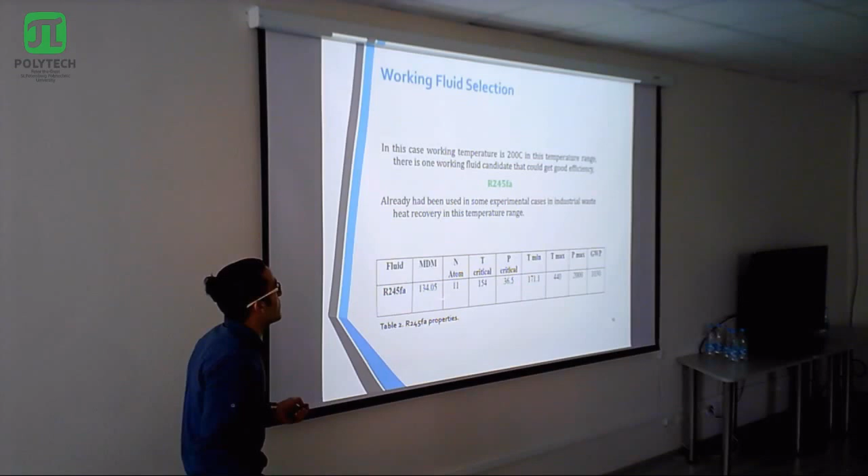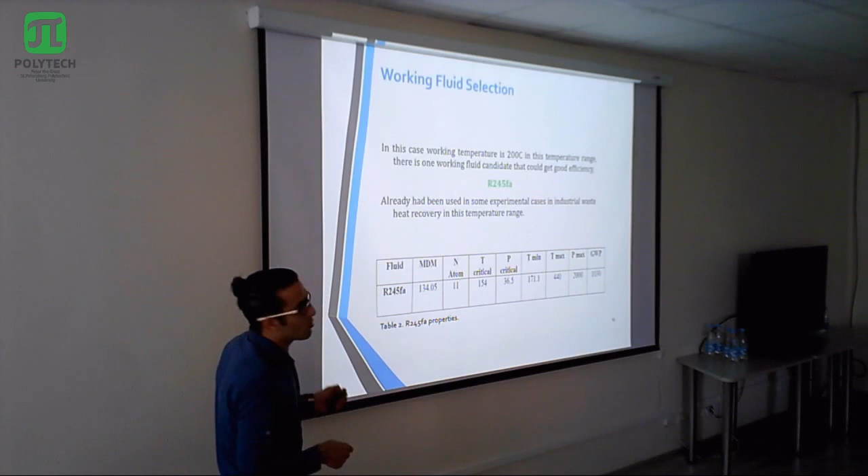This working fluid at this temperature range is actually one of the best working fluids used in some experimental works, studies, and simulations. Around the world, only 2 experimental works on cement and ceramic industry have been done, one in the 1980s and one in 2013, both in Spain. There are no other experiments about this.

And we have properties of the working fluid: atom number, critical temperature, critical pressure, minimum temperature, maximum pressure, and GWP, global warming potential.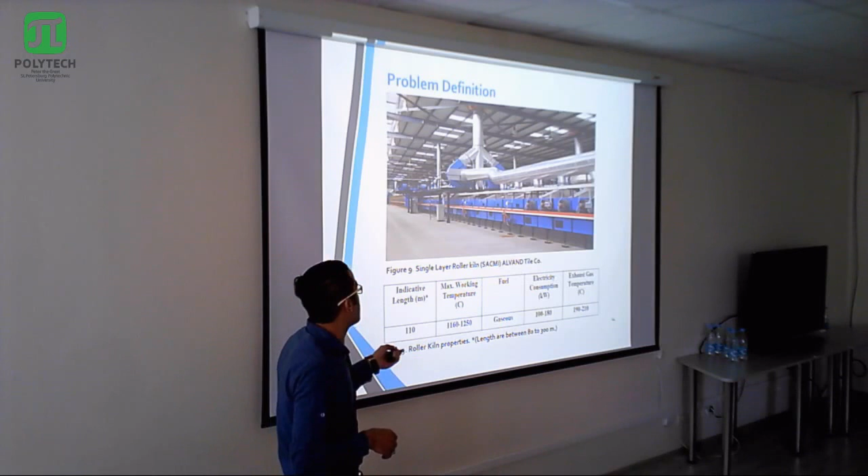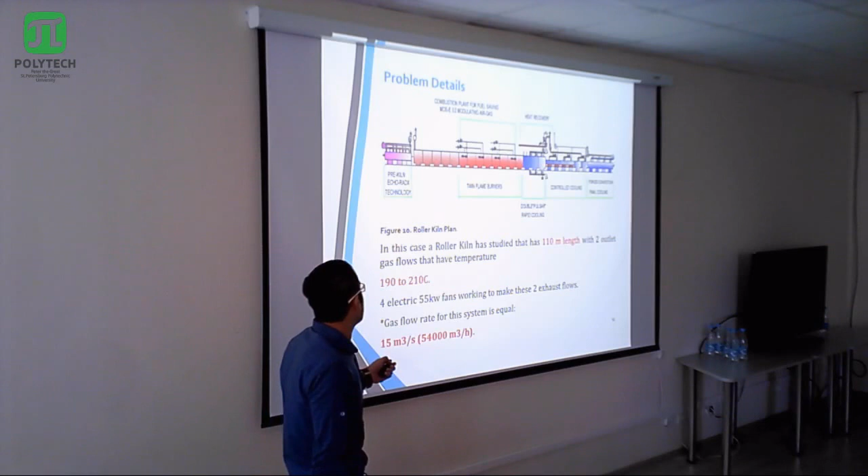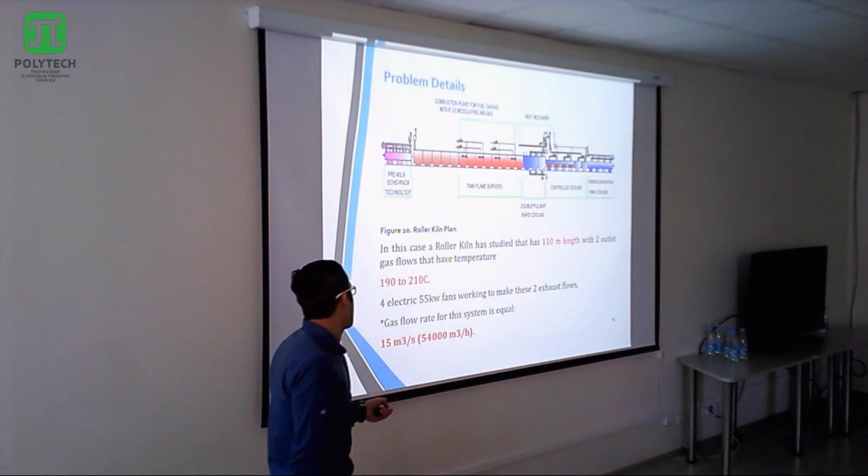Here we have the problem definition. It's relative to an advanced factory in Iran that we considered, with real data. Temperature in exhaust gas from the kilns is from 190 to 210, and the gas flow rate is like 15 cubic meters per second, which is like 54,000 cubic meters per hour.

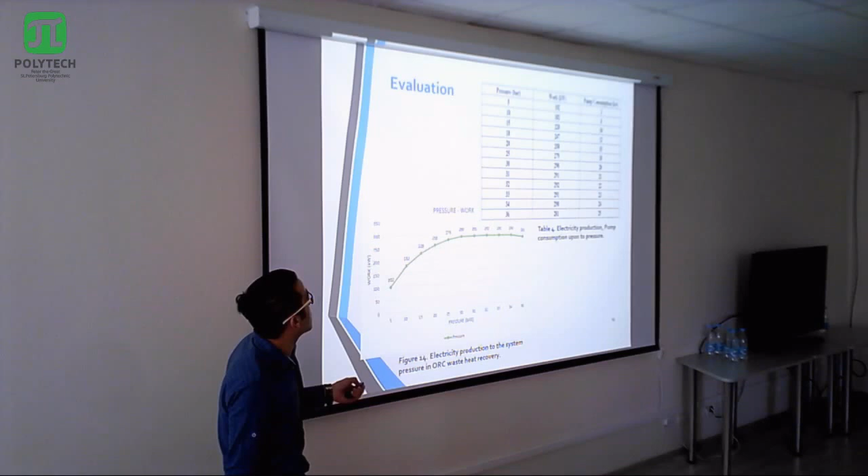I simulated this study with different pressures, from 5 bar to 36. The best pressure is like 30 or 31, where we have 290 or 291 kilowatts. But at higher pressure we can see 22 kilowatt consumption for the pump, while at 31 we have 21. Beyond this pressure, we don't generate that much more work, but we have more consumption for the pump. So it's not throwing power, it's not logical to use a more powerful pump that consumes more energy. So the best and optimized pressure is like 30 or 31, as you can see here.

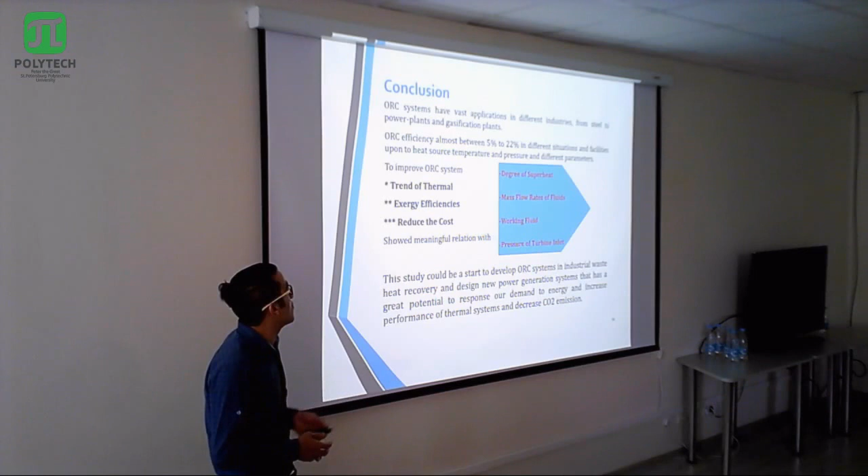Actually, it's a problem with some companies manufacturing ORC systems, like Ormat and Turboden. They are the biggest companies; Ormat is in the USA and Turboden is in Italy. They have this much cost, like $2,500 for each kilowatt, but it will decrease in the future. It needs time though - it was more expensive 3-4 years ago, and now it's like that much.

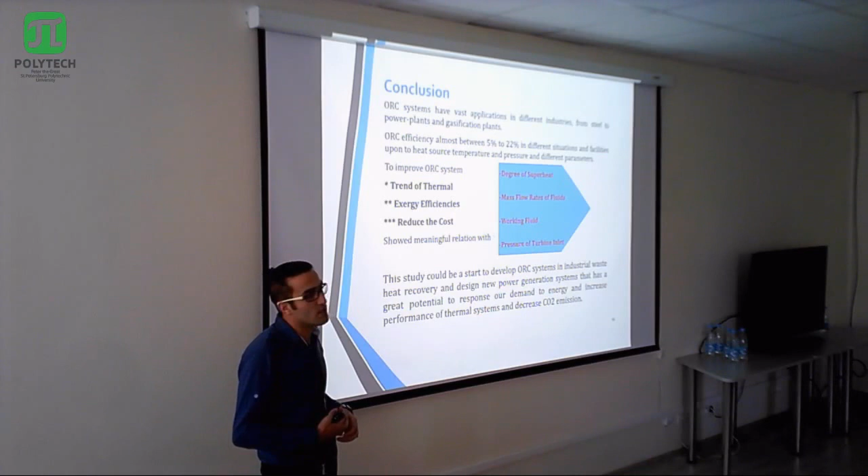In this study we started to design and simulate this waste recovery system for the ceramic industry, because in Iran we have more than 100 ceramic factories, and we have a lot of losses in this industry. It's also a good start to develop this system for different industries, like steel and cement industry, and we can increase the performance of thermal systems totally in different industries or power plants, and decrease CO2 emissions.

And thanks for your attention.

Thank you. The student showed good academic performance with 8 excellent, 6 good, and 0 satisfactory grades, and his academic supervisor believes his independent work deserves a good grade. Do you have any questions?

I have a question. Please show page number 40.

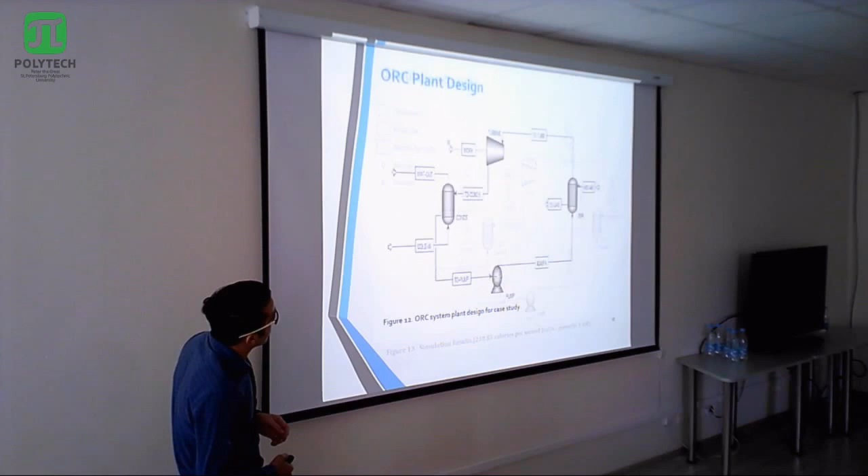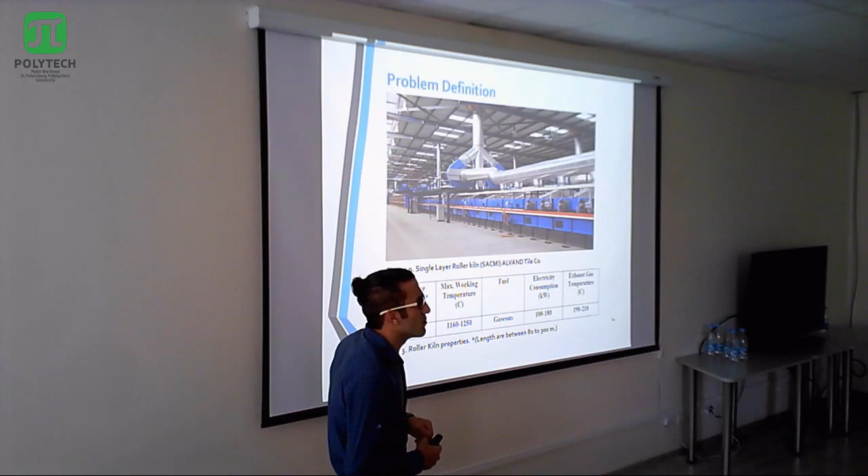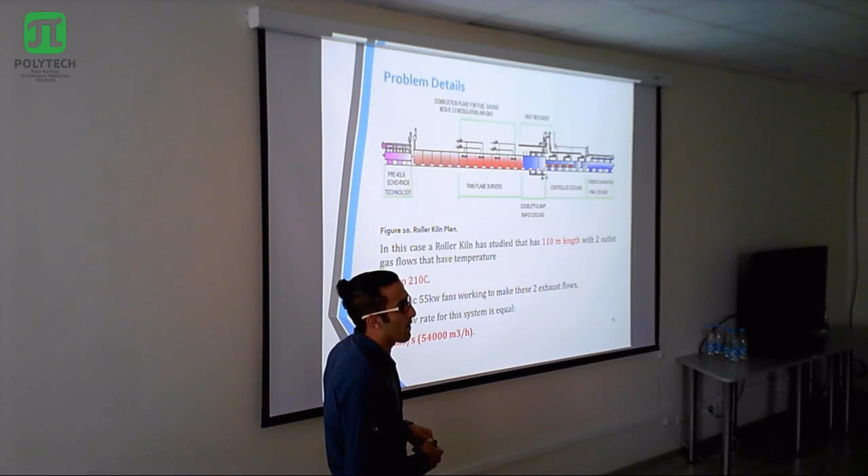What is the unit of measurement? No, what unit do you apply for measuring pressure? Pressure is in bar in this. Bar, yes. The maximum in your table is lower than... what is the pressure? The table with pressure, maximum pressure and other pressure. Oh yes, this, no, before. Critical pressure, yeah, height, it's bar. Yeah, bar, maximum, yes.

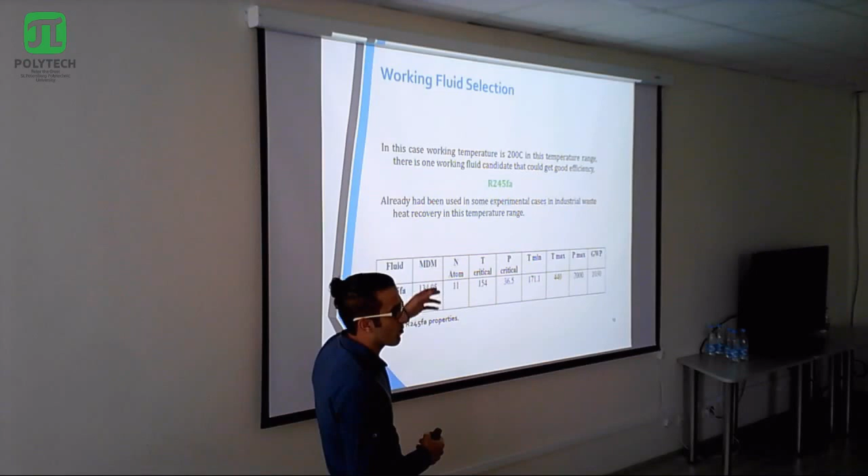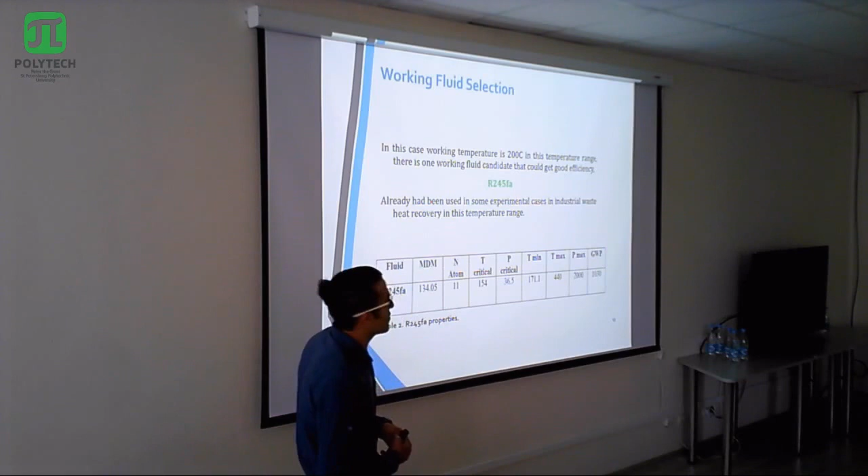Any other questions? Thank you very much.